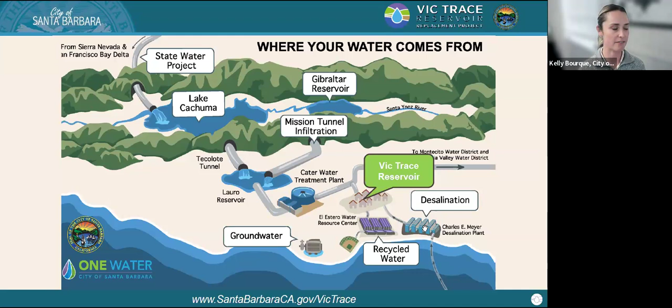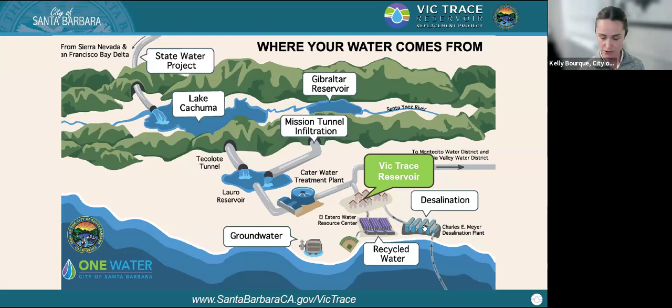It is treated drinking water. And then from there, it goes out to wastewater treatment, our recycled water system, and thereafter. So this project is critical in that it is just one piece of the larger infrastructure system that we support, and happy to introduce you to the project coming up next.

So the Vic Trace Reservoir is located in the Mesa neighborhood on the map shown here. It's located between Meigs Road and Cliff Drive. It was built in the 1950s. It's reaching about 70 years old now. The lifespan of these tanks is usually around 50 to 75 years.

It's a critical storage facility in that it stores 10 million gallons of drinking water locally, in town, should we need it to meet demands, meet fire demands, local emergencies. And it also serves 60,000 people, or 70% of the city. Water comes from Cater, the water treatment plant, to this reservoir, to downtown, the west side, and Mesa neighborhoods.

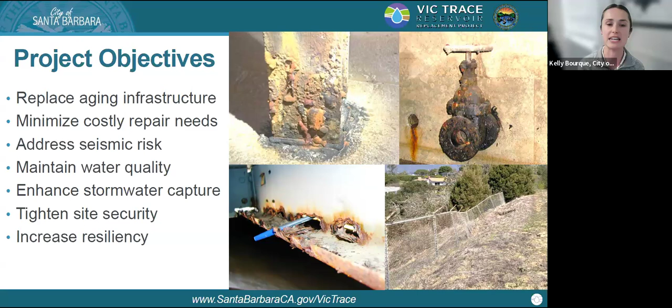And then these last two, we want to tighten site security. We know security is a concern for local residents in the area. And there's new regulations coming out that say that we need to have more robust security of our critical water sites. And then hopefully in summary, this all just shows that we need to make the site more resilient now and into the future.

So our work to date: since we set out to do this project, we've done dozens of site visits. We've performed seismic geotechnical studies. We've also performed some preliminary biological and cultural studies of the site. We've started investigating traffic and construction impacts. We've done some hydraulic modeling to make sure we can take this tank offline during construction.

We've looked into different funding avenues. We've looked at cost estimates, so I'll be speaking to that in a couple slides. We've also conducted lots of interviews with interested parties and neighbors in the area and put together a strategic communications plan.

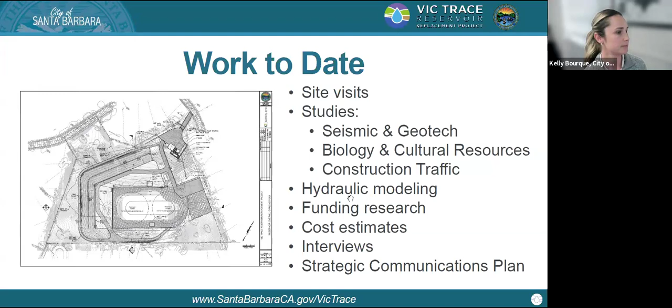So currently, as of today, we're at what's called a 15% design phase. Engineers typically work from 0 to 100, so we're only 15% of the way there. Which is the perfect time to come to the community, to our collaborators, to discuss, what do you think? It's a good time where we can consider changes and incorporate them without them being too costly down the road.

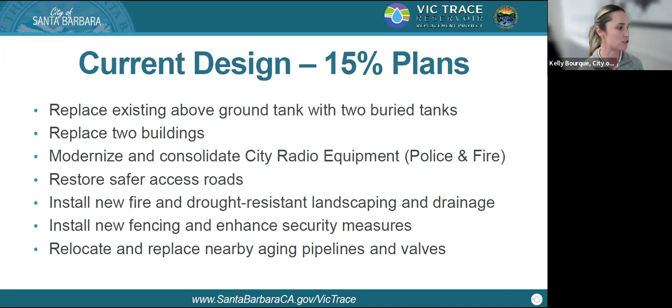So as of today, what's listed here is kind of what we know to be true, what we have designed. We know that we will be replacing the existing above ground tank with 2 underground buried tanks. I'll have a picture of that next. We'll be replacing the buildings on site that support the reservoir and house some other water facilities. We're going to modernize the radio equipment on site and consolidate a lot of that old infrastructure. We're going to restore safer access roads.

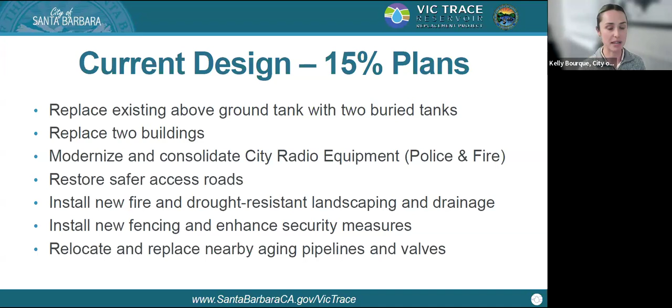We're going to install new fire and drought resistant landscaping. And like I said, we are going to be improving the drainage. We'll also install some new fencing and enhance security. And then lastly, apart from the site, we have a lot of pipelines coming in and out of the reservoir along the streets in the neighborhood. Those were also installed in the 1950s. So it makes sense for us to just come in here and replace all of those at the same time.

So the next couple slides I'm going to show are our renderings. So these are illustrations of our design as of today, which again is only at 15%. So similar to when you build a hotel, these are renderings to help illustrate how the project's going to look post-construction.

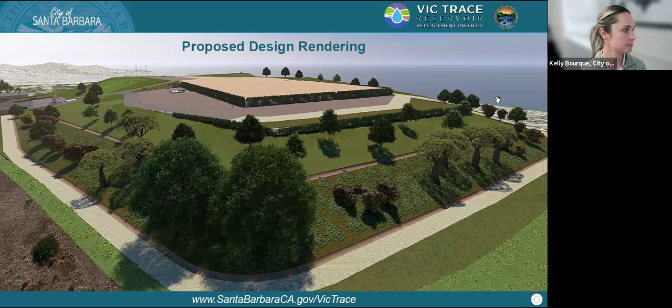What you're looking at is, here I'll use my cursor, 2 buried tanks underneath this top terrace, a wraparound access road, and then another wraparound access road, both for water distribution and fire personnel. Here's another shot from above.

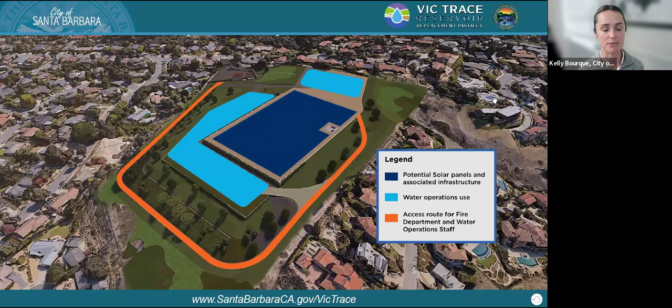And this is a view from the driveway on La Coronilla. You can see it'll be very difficult to actually see the reservoir from the street. The driveway will be improved. There'll be a new fence, but hopefully once we're gone, it'll go back to a nice, somewhat quiet neighbor.

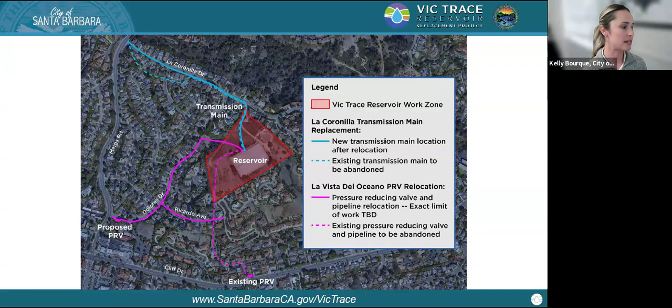Here is a map of the pipelines that I was speaking to. So what this shows is there's a major pipeline along La Coronilla that will be replaced. There's also going to be new pipelines installed along Dolores Drive and Ricardo Avenue. So if you live along those areas, you can expect some construction impacts just similar to the pipeline replacement that is around town typically.

So in summary, this project achieves a lot of benefits for the city and the community. One is making this reservoir seismically up to date. It'll meet today's codes, which are meant to last the next 50, 100 years. We'll be improving the site drastically from how it is today. We'll be improving the security of the site and the safety for city personnel and fire personnel to travel around the site, and then making the site more resilient itself, but also making the city's water system as a whole more resilient, making sure that this asset is hardened and available for us for the next 100, maybe even 200 years.

The project timeline in all goes from 2024 to 2031. So it's about a 7-year project, but that's starting from day one to end. We're currently in the design phase. We're about to start off the environmental review phase. So we will be hosting more workshops specific to design and the environment.

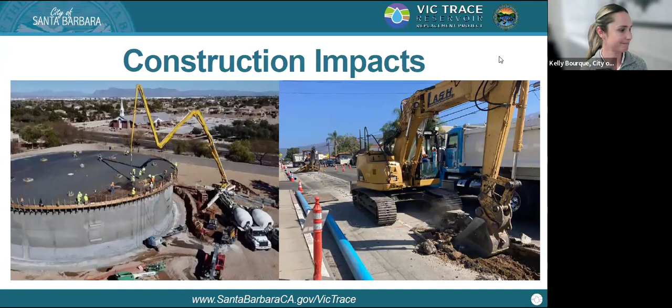And budget, the current construction cost estimate, so just the construction piece, is 113 million. With other costs, that brings the project total up to almost $130 million. That's the construction cost estimate now at 15%. We will be doing some value engineering to really fine tune that number. For funding, we are investigating and likely going to be applying for low interest loans that are offered by the state and some bond measures as well.

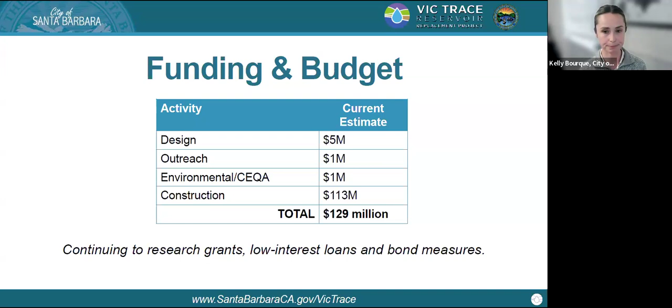For community engagement, like what we're doing now, today's feedback will help inform future project plans and the design moving forward. We will have future public meetings centered around all sorts of topics, environmental, land use. We'll have both community public outreach meetings, but we're also going through the same city process that any development would go through. So planning commission, water commission, lots of meetings.

So if you would like to keep up to date with whenever those meetings are, you can go to the project website and hit subscribe, or feel free to send an email to the project email address, which is victrace@santabarbaraca.gov.

So, some community feedback we've received to date. We've heard from you all so far that you want this to be a transparent process and have access to information such as our website. We've heard that you want to know how this project will be funded and how it may impact rates. And it goes without saying, definitely construction impacts.

And then lastly, some sustainability features, which I would say is a catch-all for wildlife, biological, and those sort of items. So for today, we would love to hear your feedback on any of these topics, any other topics, any questions you have, and we'll do the best to either answer them or note them for the future.

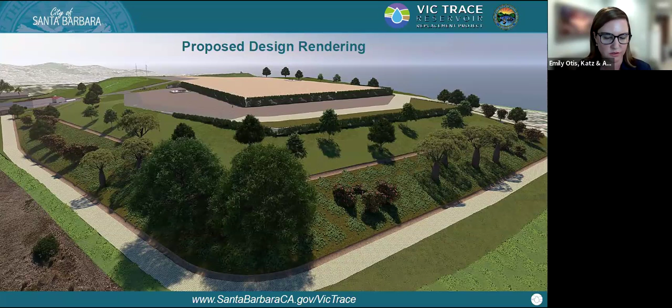No, I wasn't sure. Okay, so the next question is, how is the decommissioning process going to be conducted? So maybe Don could start talking about that. So the VicTrace Reservoir decommissioning is really going to be a process in which we isolate the reservoir from the distribution system, and then that reservoir will be drained, and anything inside the reservoir will be removed. While the reservoir is drained and while it's isolated from the distribution system, water will be rerouted around the VicTrace Reservoir so that the existing demand within the system is met from the supply side of VicTrace Reservoir.

And then the process will begin to demolish the existing reservoir. And then once the reservoir has been demolished and removed, the site will actually become a pretty quiet site after that. And a lengthy process will go on excavating out the site and constructing the replacement reservoirs. There are also several appurtenances that go along with the replacement reservoirs. So support buildings, as Kelly has indicated, and pumping stations and numerous pipelines surrounding the VicTrace Reservoir site that will be replaced, bypassing the reservoir site and allowing us to improve the flow of water back out of the VicTrace Reservoir and into the distribution system once the reservoir is completed.

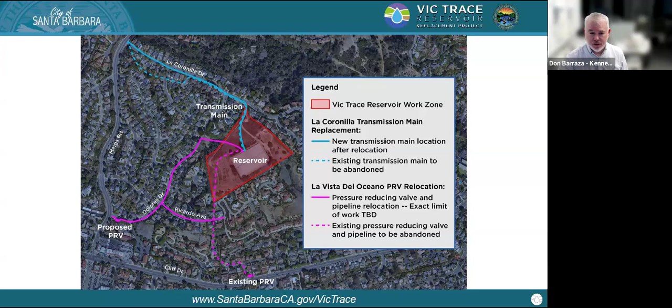I will say that again, there are multiple routes to the Victrace Reservoir site. All different types of routes will be utilized throughout construction, and that is because some routes that will be utilized during construction may be impacted later by pipeline construction, and so they will be interrupted for their use for traffic construction.

And so we'll probably be utilizing several of the different streets that lead in and out of the Victrace Reservoir site from both Cliff, Meigs, and the other streets, the main arteries that serve and come through the neighborhood streets into the Victrace Reservoir site.

Oh, bummer, Emily. I think you're still having sound issues. But no worries. I'll pick up. Oh, sorry. Oh, there you go. There you are. Am I back? Okay. Yes. Gosh, this is so bizarre. This has never happened to me. Okay, so fine, let's just keep rolling.

The next question, has it been considered to allow homes that back up to the reservoir to have an easement for solar panels? So Kelly, maybe you want to start with that? Yeah, I haven't heard that before. We will note that down, but I will say we are engaged with the Sustainability and Resilience Department here at the city, and they kind of take the lead on Santa Barbara Clean Energy, Santa Barbara Community Choice Energy.